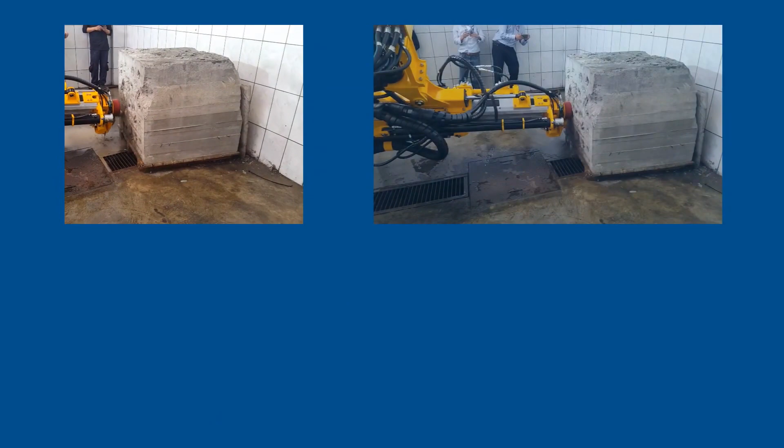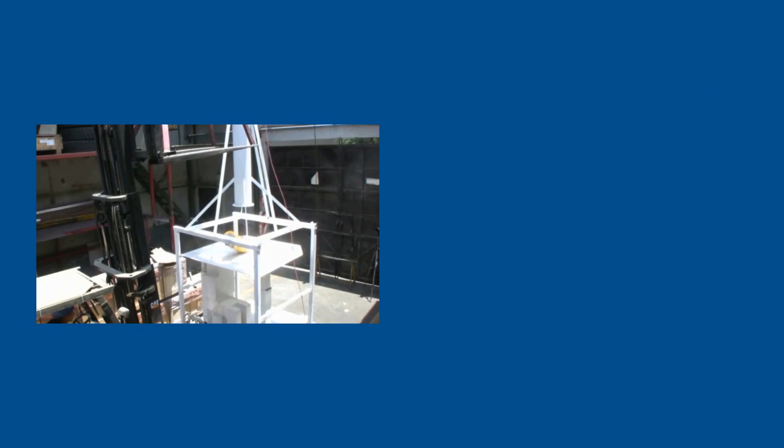However, with multiple design iterations, revisions, and testing scenarios, this real-world validation becomes very expensive. To optimize these costs, products are tested virtually with the same real-world conditions. Connecting SOLIDWORKS to the 3DEXPERIENCE Cloud platform enables you to rapidly iterate and validate as you go, and design the best performing products before a physical prototype is ever made.

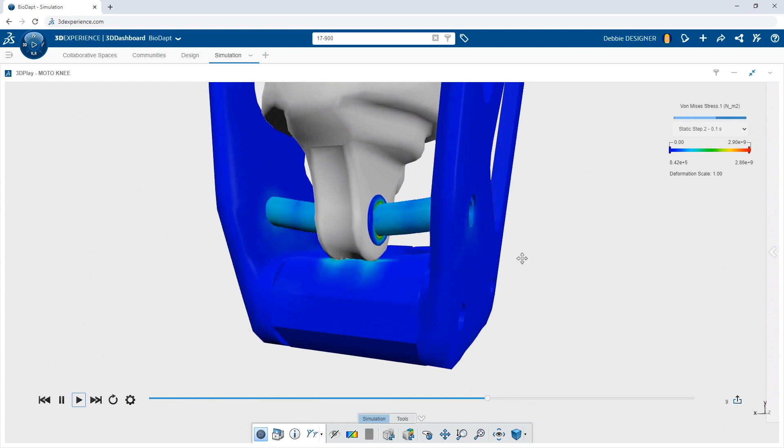Structural analysis like this is common to discover product issues early. Track metrics like durability, user comfort, even manufacturability of formed metal components. Industry-leading Abaqus technology makes it possible for you to reach these next-level validations.

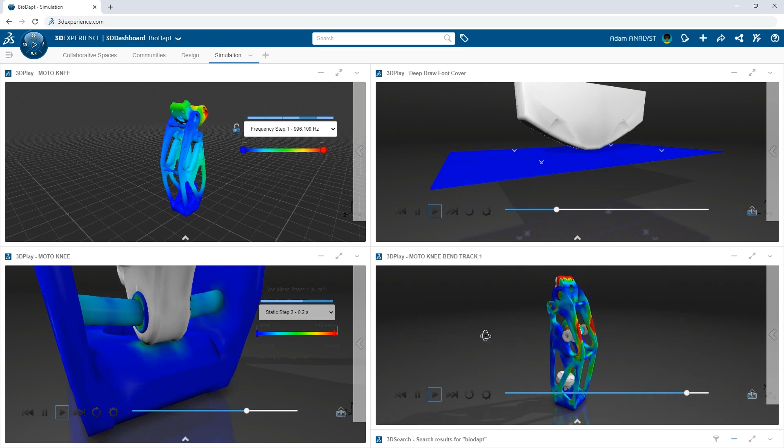And since the results are stored on the cloud, you can easily share and review from anywhere without spending time publishing a printed report. But product performance relies on so much more.

Simulate fluid flow to assess hydrodynamic effects. Couple external fluid forces with structural analyses to help ensure everything will work right the first time.

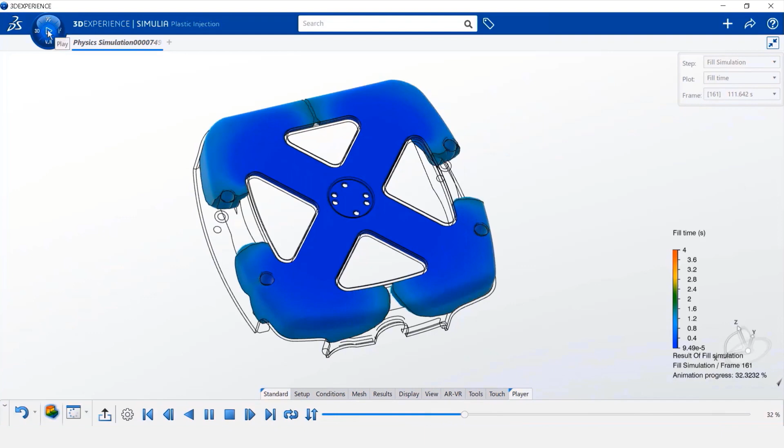Evaluate the manufacturability of plastic injection molded parts, leveraging an included material database of thousands of supplier plastics. And virtually test electromagnetic components for their performance, reliability, and safety in harsh environments.

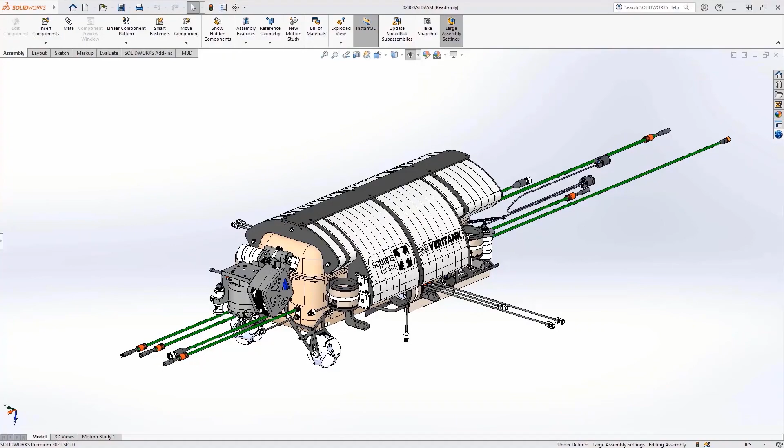Simulating these multi-physics scenarios on the 3DEXPERIENCE platform streamlines the validation process by keeping everyone in sync with the single source of design data. And alternatives to the product design can be easily explored and optimized.

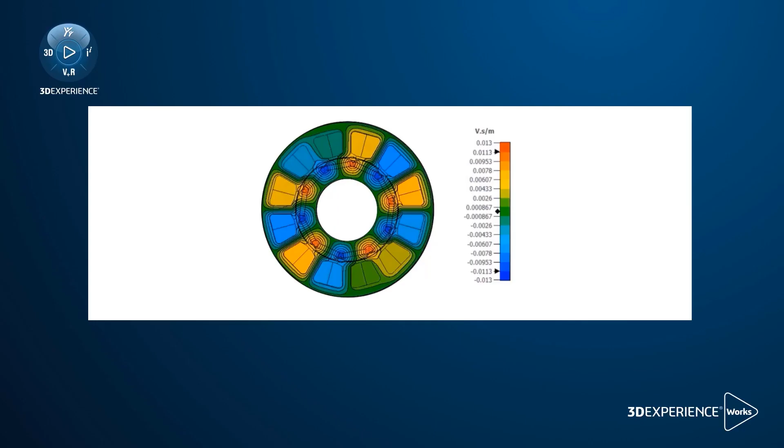Compare and rank different designs and variations based on key performance indicators, whether that be the electromagnetic performance, operating thermal conditions, structural integrity, durability, and more.

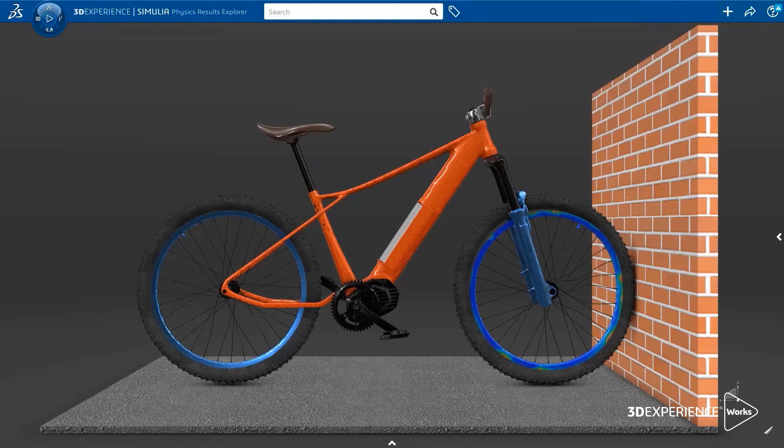The ability to run these simulations on the cloud is included, so you can leverage high-performance computing to get your results faster and free up your local hardware.

Exceed your customers' expectations, satisfy industry requirements and regulations, and build your optimized product right the first time, all on a single platform and connected with SOLIDWORKS.

Structural, fluid dynamics, plastic injection, electromagnetics, even kinematics. What's on your horizon? Be ready to take it on with 3DEXPERIENCE Works.